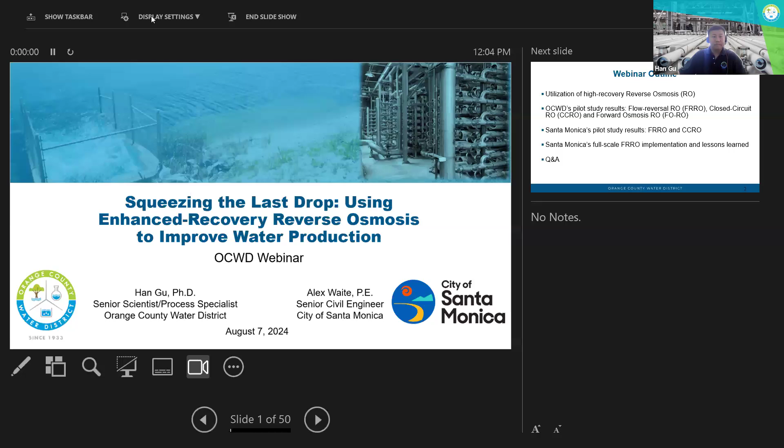Right, thank you very much, Meta. Let me get the presentation mode. Thank you very much, Meta, for the kind introduction. Good afternoon, my name is Han. I'm a senior scientist, process specialist from Orange County Water District. I'm really excited, happy, and feel honored to join this webinar.

As Meta mentioned, we have 2 presentations. The unifying theme is squeezing the last drop, using enhanced recovery RO to improve water production. This is the webinar's plan: I will talk first about OCWD's pilot studies on 3 high recovery RO technologies, and then Alex will take over and talk about Santa Monica's pilot study and full-scale implementation of 1 high recovery RO technology, and we will end with the Q&A session.

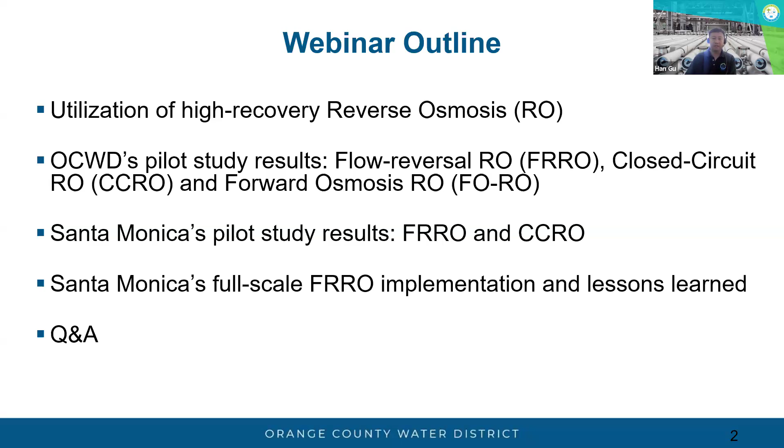So this is the title of my presentation today. I will share with you 3 piloting studies using high recovery RO technology. They are flow reversal RO or FRRO, closed circuit RO or CCRO, and forward osmosis RO or FORO. A brief outline of my presentation follows.

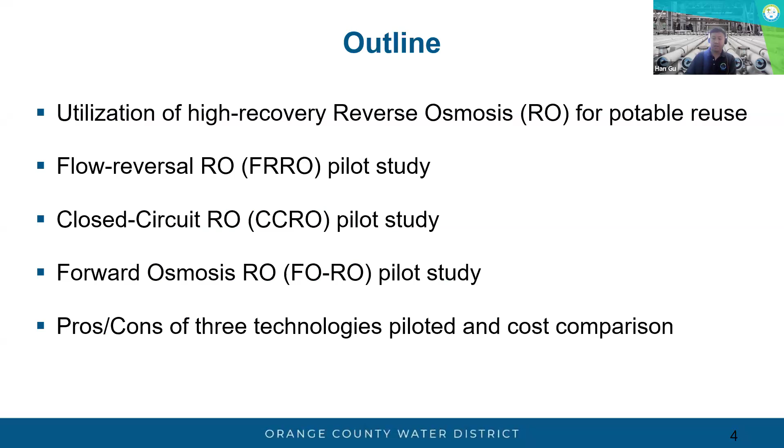I will provide some background information which will lead to the motivation for this work, which is to utilize high recovery RO to increase the recovery for potable reuse applications. I will go over each technology separately, and near the end, I will show you a table that summarizes the pros and cons of the 3 technologies we pilot tested, and discuss preliminary cost comparison among the 3.

So first, some background information. I think some of the audience here are familiar with reverse osmosis systems and processes. Conventional RO can remove dissolved solids, basically salt from the water, macromolecules and pathogens, but the recovery is still limited, mostly by mineral scaling in the feed water. If we're talking about potable reuse application, we can go up to 85% recovery on a 2 or 3 stage RO. This means 15% of the feed will become a concentrated waste stream.

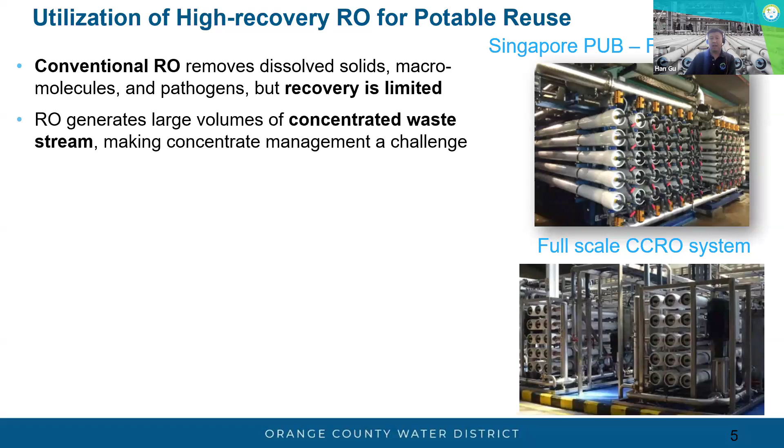For inland application, concentrate management and discharge is a real challenge. At R&D department, we have explored several high recovery RO technologies in the past 5 or 6 years. I mentioned the CCRO, FORO, and FRRO pilot testing. The goal here is to really test them out in pilot scale to make sure operationally they're feasible, and also to see if they're economically viable on a larger scale.

Closed circuit RO has been pilot tested at a number of utilities, including Singapore Public Utilities Board or PUB, Padre Dam, and LA County Sanitation District. The recovery ranges from 90 to 96%.

Singapore PUB also tested flow reversal RO at full scale in one of their NEWater facilities from 2017 to 2022. They were able to increase their recovery from 75 to 90%. The image on the upper right shows the Singapore retrofitted FRRO. They didn't really build a new facility, but modified the existing RO to implement flow reversal.

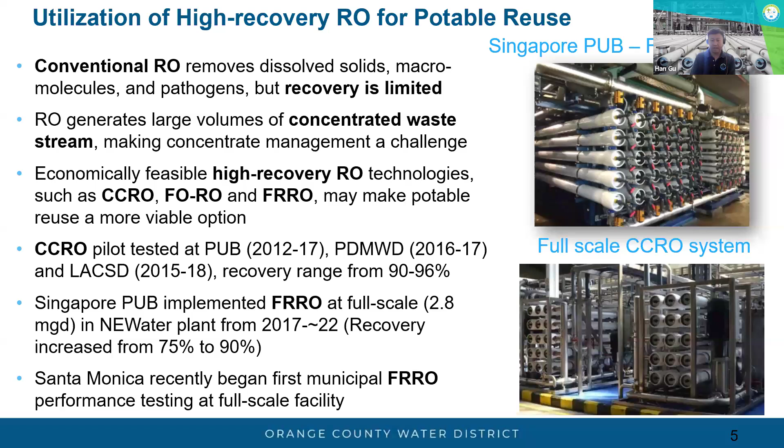And lastly, the city of Santa Monica has recently begun testing the first municipal flow reversal RO at their full-scale facility. Alex will talk about that in the second half of this webinar.

All pilot testing I will be mentioning today was completed at the Groundwater Replenishment System, or GWRS, at Orange County Water District. GWRS is currently the world's largest potable reuse facility. We can produce up to 130 mgd of highly purified water.

We completed the final expansion of the GWRS in 2023. This is a joint project between OC Sanitation District and OCWD. This simplified diagram shows the basic layout for the advanced water purification facility within the GWRS.

We're taking secondary wastewater effluent from OC Sanitation District, from 2 plants, about 174 mgd, and it undergoes a 3-step treatment process. First step is microfiltration, ultrafiltration. Second step is reverse osmosis, and then ultraviolet light with advanced oxidation, or UV-AOP process.

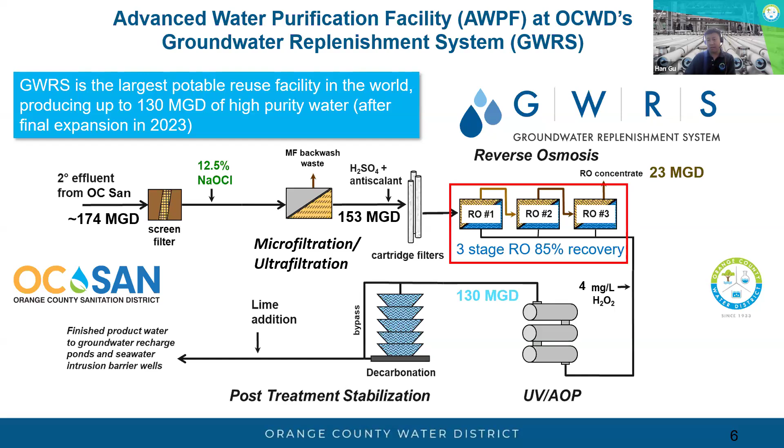After post-treatment, the final product water will go to our groundwater recharge basins in Anaheim and seawater intrusion barriers to prevent seawater intrusion. Focusing on the RO part, we have 27 5-mgd RO units. Each of them is a 3-stage RO running at 85% recovery. The combined concentrate discharge is about up to 23 mgd, and currently it is going to the Pacific Ocean.

So what is the benefit of increasing recovery for the RO on GWRS? The most obvious reason is if we're able to increase the recovery, say from 85% to 91%, as shown in this diagram, we could generate more RO permeate. In this case, about 9 mgd more additional permeate, and at the same time, we could reduce the RO concentrate discharge by the same amount, so from 23 down to 14.

There are also many other drivers for enhancing RO recovery. This includes, first, cost of imported water has been increasing steadily over the years, so water resources have become really valuable. Secondly, water conservation methods have reduced the source volume available for us to treat, so we have less wastewater to treat with. And thirdly, environmental stewardship — we don't want to discharge large volumes of highly concentrated brine into the environment.

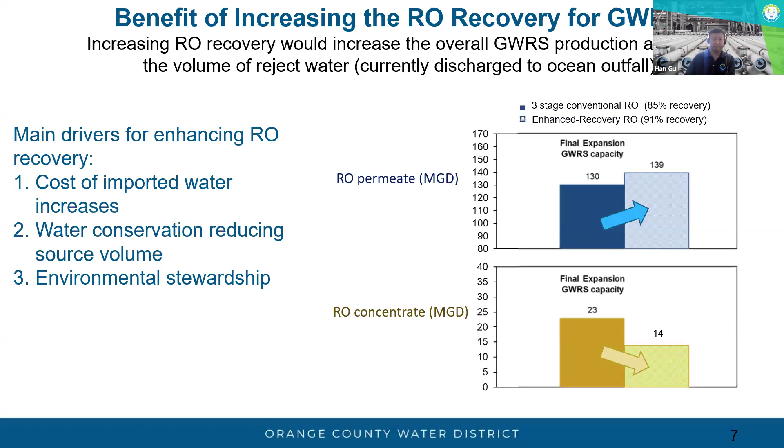With that, I will go into the first technology I will cover today, which is called flow reversal RO. This is a continuous system utilizing conventional RO components, but there are 2 key features. The first one is called the feed-side flow reversal, or FR. This diagram illustrates the basic concepts. Let me get my laser pointer out.

So this is a RO pressure vessel. You can imagine there's RO membrane installed in series inside. In a conventional RO configuration, the flow direction is fixed. The water will always go in from this side as undersaturated solution, and as the water moves across the pressure vessel, it gets more and more concentrated because we're removing permeate.

Near the exit region, mineral ions in the feed water could become supersaturated, so we could see mineral ions or crystals start to form on the membrane surface. This is due to the concentration polarization effect.

For the flow reversal process, it's really simple. We're switching the flow direction periodically, so we will feed in from this side. We use the undersaturated feed solution to dissolve or remove the crystal or scale already formed on the surface from the last cycle, and we're also reversing the concentration polarization profile.

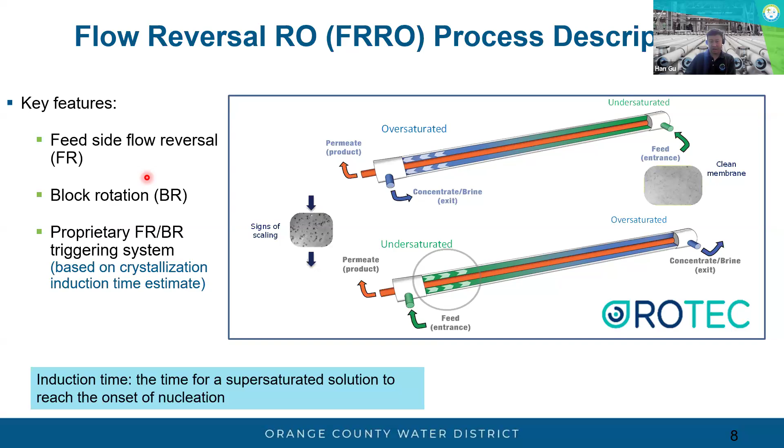Alex will explain that in more detail in his presentation.

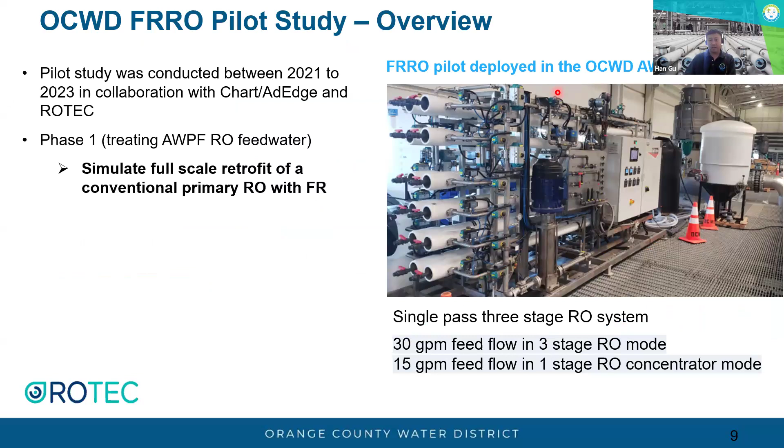This is the overview for the flow reversal pilot testing at Orange County. We conducted this between 2021 to 2023 in collaboration with Chart and Rotec. There are two phases to this pilot testing. In phase one, we're treating the AWPF RO feed water, simulating a full-scale retrofit of a conventional primary RO. In the second phase, we're treating the RO concentrate directly, simulating an RO brine concentrator.

Because we completed phase one before the completion of the final expansion, the final expansion feed water actually changes—we have higher salinity in the feed—so we wanted to do a repeat. This is called phase three, just to ensure that the pilot could keep the good performance and treat the final expansion feed water. I included a photograph showing the pilot deployed in the AWPF RO building.

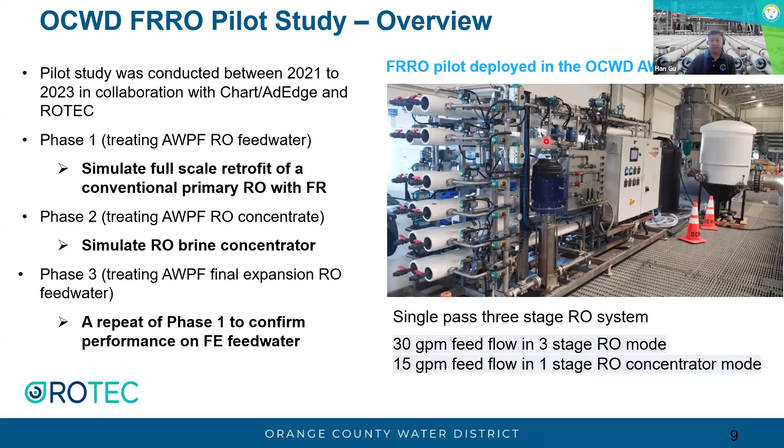This is a 30 GPM system, 3-stage RO, single pass. This is the summary of findings for the flow reversal pilot study. In the first phase, the primary phase, we achieved 89 to 90% stable recovery. No additional chemical is needed.

Here's a plot showing the normalized specific flux over about a 3-month runtime. This is a steady state trial where we keep the recovery at 90%. The block rotation and flow reversal is about 40 minutes for the first and third stage, and for the second stage the flow reversal occurs every 10 hours. Overall, the normalized specific flux declines about 23%.

Overall, pretty stable. We also optimized the chemical cleaning recipe and determined that a 3-month runtime between chemical cleanings is most optimal. This is in comparison with the full-scale RO CIP interval, which is about 6 to 12 months.

We also completed phase three after the final expansion to ensure the pilot could treat the final expansion feed water. Unfortunately, for the RO concentrate mode, it was not very successful. Basically, we were able to run to a recovery of about 91% overall, but we determined the operation was not sustainable because of very heavy scaling, and the clean back was not very good after a CIP.

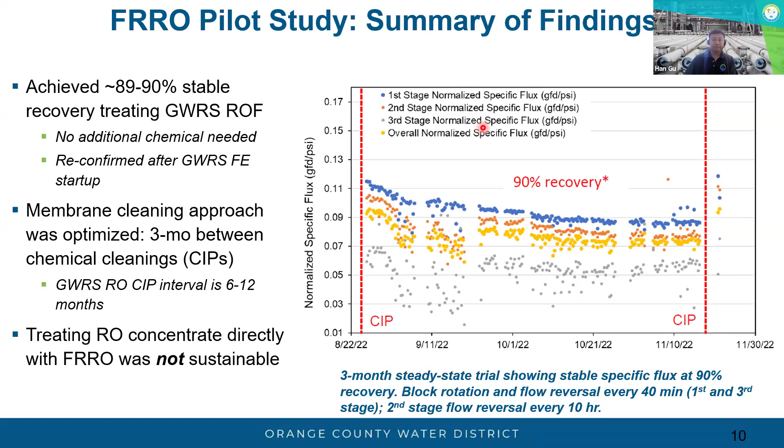So I will now talk about the second technology. This is called the closed circuit RO, or CCRO. It's a single stage RO, but a semi-batch process, relying on complete recycling of the RO concentrate. Because this is a semi-batch process, there are 3 steps in the operation mode.

In step 1, called the closed circuit mode, in addition to conventional RO components—feed pump, high pressure pump—we also have a recirculation pump that recirculates the RO concentrate back to the feed, 100% of the concentrate back to the feed, while we're still producing permeate. As time goes on, the water in this loop becomes more and more concentrated, and the filtration time determines the volumetric recovery and the pressure in this loop.

At the bottom, we have a side conduit, which is just an empty pressure vessel with no membrane, holding the fresh feed water from the previous cycle.

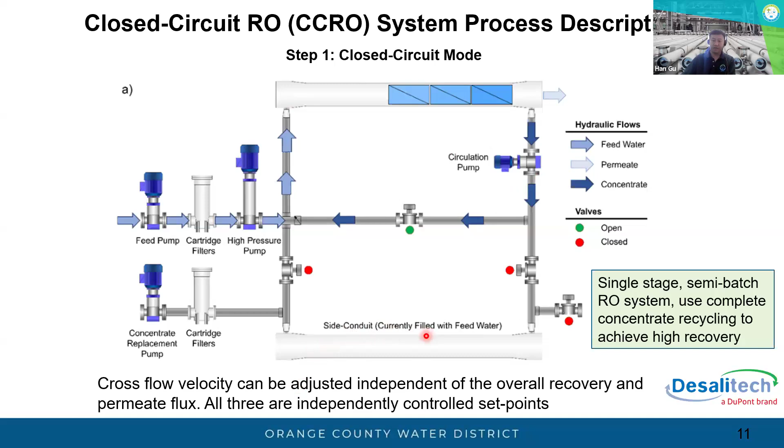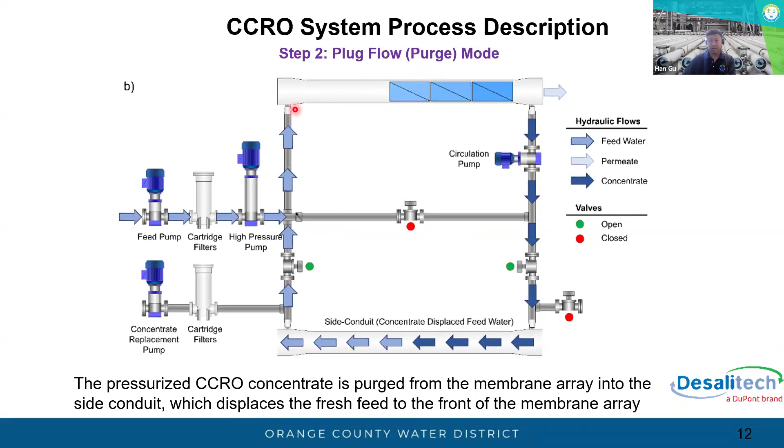In step 2, called the plug flow mode or purge mode, at the end of a cycle, when the volumetric recovery reaches the set point, the final concentrate gets pushed into the side conduit, and at the same time the fresh feed gets pushed into the front of the pressure vessel holding the membranes. This is essentially a flushing step.

Step 3 is called the side conduit refill mode. A concentrate replacement pump activates and recharges the side conduit with fresh feed, then discharges the final concentrate from the last cycle out of the pilot. The key here is to maintain good concentrate flushing efficiency. If we don't have that, we will have scale or precursor of scale trapped in there, and it will foul the membrane quickly for the next cycle.

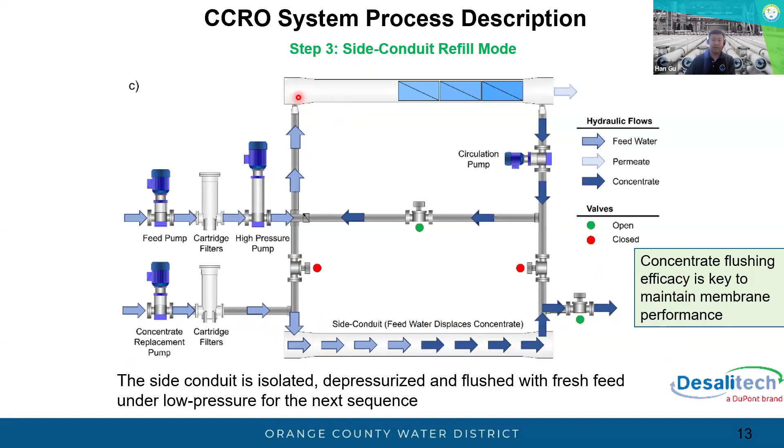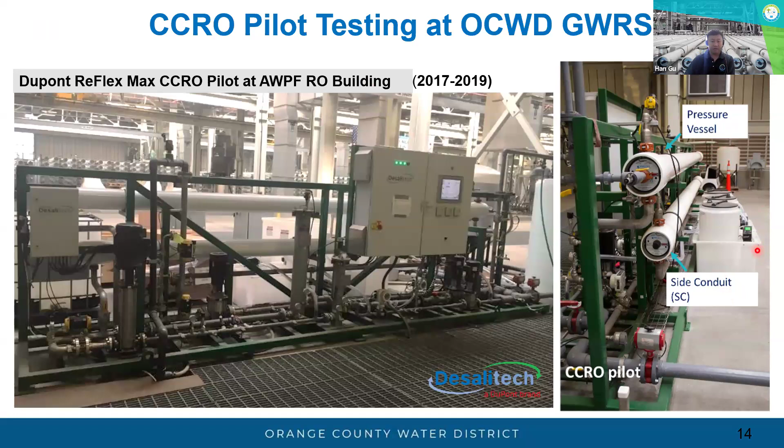Here are 2 photos showing the CCRO pilot deployed in the RO building. We tested a DuPont Reflex model, a 10 GPM system. You can see on the photo a pressure vessel on top holding the RO elements, and at the bottom the side conduit for the flushing purpose. This pilot testing was completed between 2017 and 2019 in collaboration with DuPont and Jacobs.

There are 2 phases. Phase 1, we're using the CCRO to treat the MF effluent, which is the same as RO feed water. This is simulating a full-scale CCRO as a primary RO, and we're filling the side conduit using the RO feed water from the plant.

In phase 2, we're treating the RO concentrate directly. This is simulating a RO brine concentrator or 4-stage RO, and we're doing the flushing using either the RO concentrate water or RO feed water from the plant.

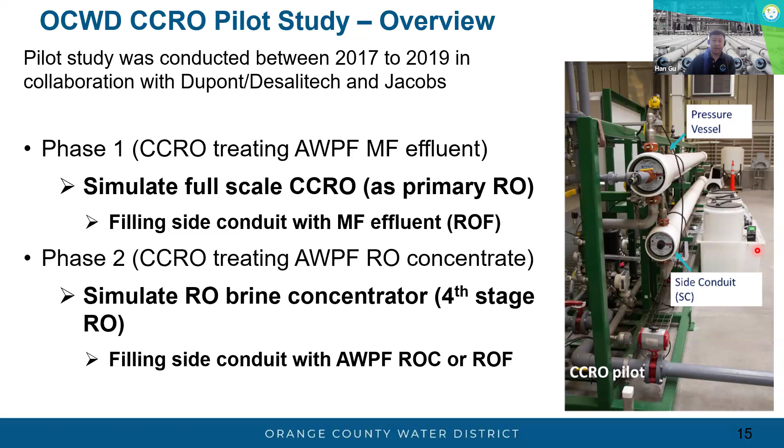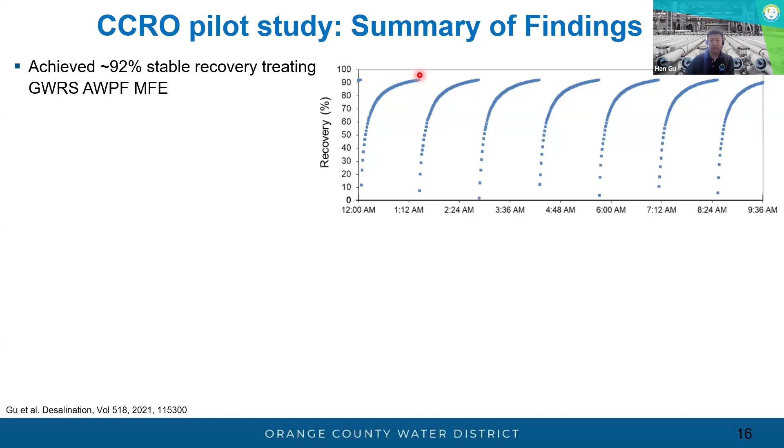Here's the summary of the findings from this phase. In the primary mode, we achieve about 92% stable recovery. This is a plot showing percentage recovery versus time. You can see the recovery is not constant in the CCRO - it's actually gradually increasing until it reaches the maximum set point, which is 92% in this case, and then it will trigger the purge mode, and we start the next cycle.

So the filtration time is about 70 minutes, and you see the cyclic behavior for the CCRO. For the concentrator mode, we achieve about 91% overall recovery treating the RO concentrate.

Experimentally, we determined that flushing the side conduit using the RO feed water extended the runtime between the CIPs by more than 2-fold. We also tested this so-called adaptive variable recovery mode to cope with fluctuating feed water quality. I have this diagram to illustrate this concept.

Here we have a plot of electroconductivity of the RO concentrate coming into the pilot, represented in the red curve. In this case, we're not running the CCRO at a constant maximum recovery, but instead we're using a maximum EC trigger. The concept is the CCRO will change its recovery based on the feed water quality. With this, it can improve the system performance.

And lastly, we determined the optimum runtime between the CIP is about 2 months for this pilot.

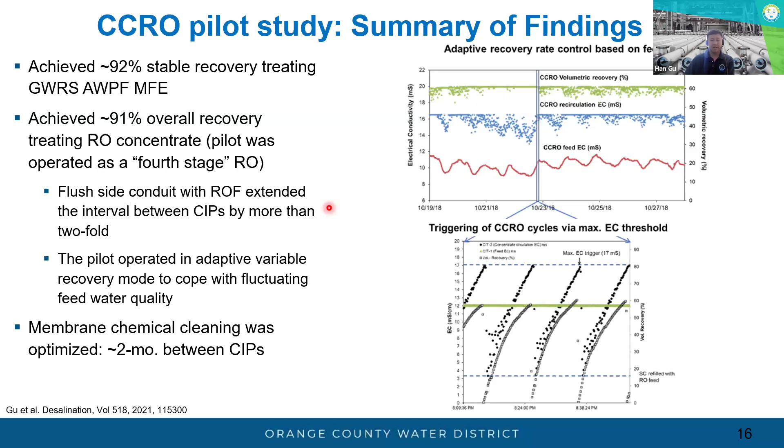Okay, I'll move on to the third technology I will cover today. This is called the forward osmosis RO. This is different from the previous two - it's a hybrid membrane system because we have an FO membrane in front coupled with the RO membrane. This is a double barrier system, one pass.

The key here is to maintain a draw solution loop. The draw solution is sodium chloride in this case. The FO membrane looks like this - a flat sheet membrane stacked on top of each other to form a membrane module.

So the feed water here is the RO concentrate coming from the GWRS. When the feed comes in, it gets in contact with the FO membrane and at the same time gets in contact with the regenerated draw solution. Because of natural osmotic pressure differences, we see a water flux moving from this direction to that.

This is causing a diluted draw solution to be produced, and at the same time we're creating a concentrate reject, which contains the contaminant removed from the RO concentrate. The RO will regenerate the draw solution, producing a final permeate, and this will loop back and link with the FO.

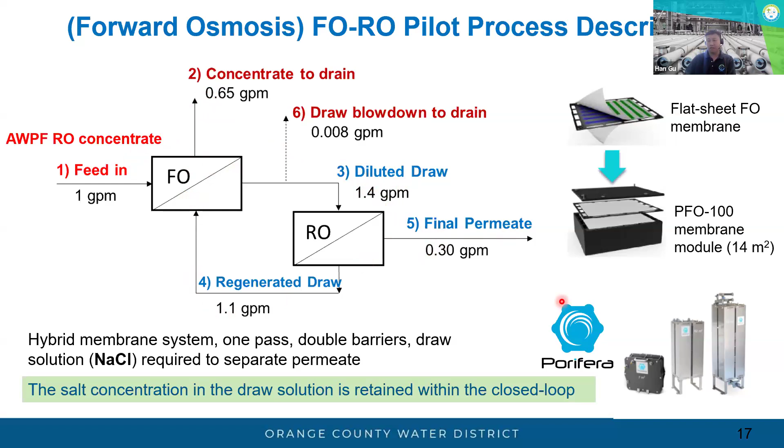One of the unique features here is the salt concentration in the draw solution loop is retained within the closed loop. So here are two photos showing the pilot deployed in the AWPF RO building.

We have this 1 GPM system from Porifera. It's much smaller than the other two pilots. You see the two FO modules here - they're running in parallel - and the draw solution makeup tank. And we have the control system here.

And behind the pilot, this is a side view. You can see a pair of seawater elements, RO elements. This is for the draw solution regeneration.

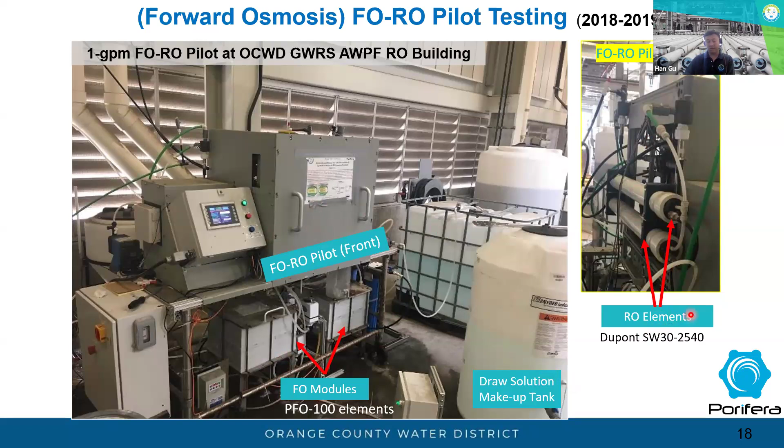Okay, so this slide summarizes the basic findings for the FO-RO pilot study. We're able to treat the RO concentrate directly, and the FO-RO system was able to run to about 35% recovery. This is equivalent to about 90.3% overall recovery.

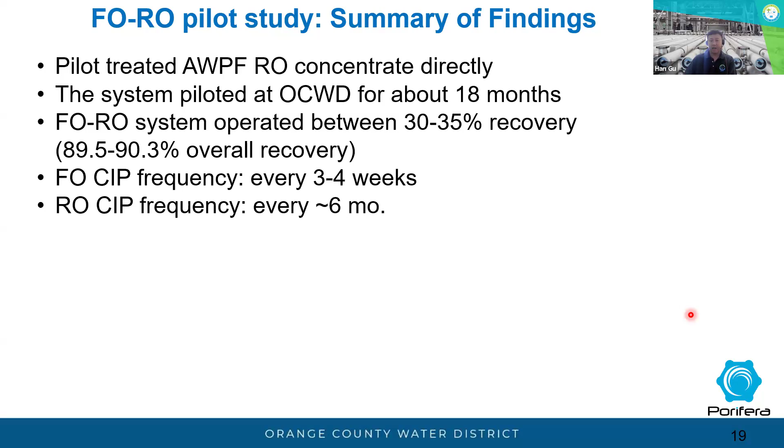The FO CIP frequency is about 3 to 4 weeks. The RO CIP interval is about every 6 months. We do encounter a number of operational challenges in this pilot study.

First one is a pretty severe organic fouling and silica scaling of the FO membrane, so that's why we need to clean it very often, less than a month.

And then we also observe some FO membrane integrity issues. This is mainly due to, if we have a pressure swing upstream, that will translate into the FO membrane, and sometimes we see membrane delamination problems.

And thirdly, we have some mechanical issue with a pressure relief valve, and that caused some draw solution bleed.

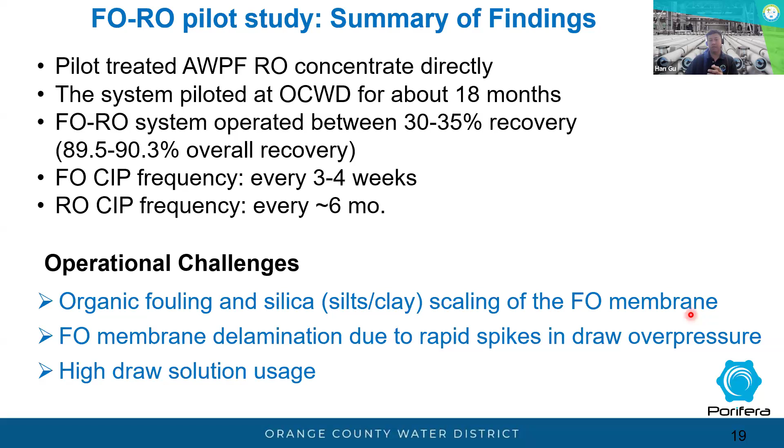So we need to add a lot of salt to make up for the salt loss in this case.

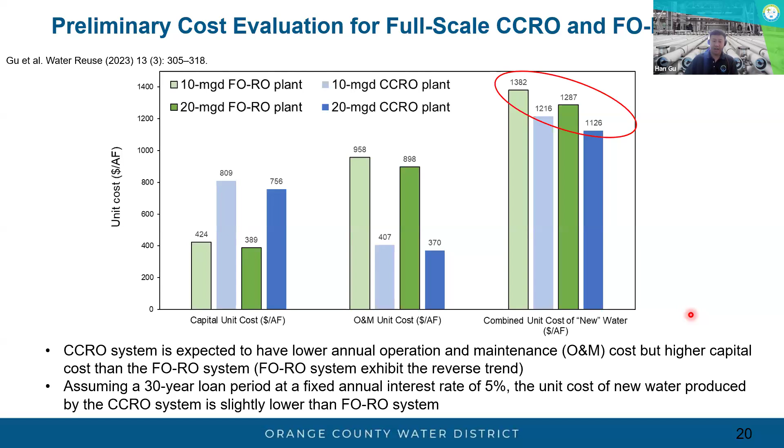For the CCRO and FORO pilot study, we also asked our partner Carollo Engineers to come up with a 10 and 20 MGD full-scale system design and preliminary cost estimate. I won't go into detail here, but the conclusion is: looking at the combined unit cost of building either a 10 or 20 MGD system using either technology, the cost is quite similar—about $1,100 to $1,400 per acre foot. This is because CCRO has higher capital costs but lower annual operation and maintenance costs, while the forward osmosis RO system has the reverse trend.

For the flow reversal retrofit, we did our in-house estimate using OCWD site-specific cost numbers. Here we're looking at 3 cases. First, if we build a conventional RO system, the unit capital cost is about $90 per acre foot. If we retrofit an existing RO system to get recovery up to 90%, we generate only about 0.28 MGD additional permeate, so the unit capital cost is about $621. The third case is the so-called melded rate: looking at the RO units plus the retrofit cost, divided by the 5.28 MGD, that cost comes out to $118 per acre foot.

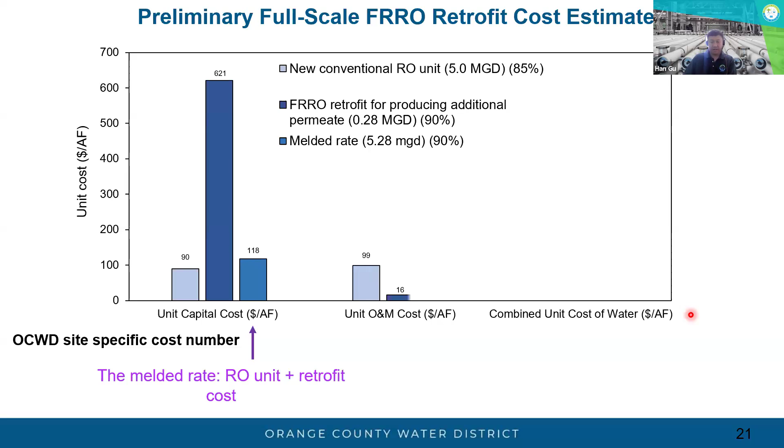Similarly, we can look at the unit operation and maintenance costs. For conventional RO units, it's about $99 per acre foot. For the retrofit, we need to spend about $16 more per acre foot because of more frequent chemical cleaning and higher electrical power consumption due to membrane fouling. Looking at the combined cost, we're talking about $637 as the combined cost for generating the additional water.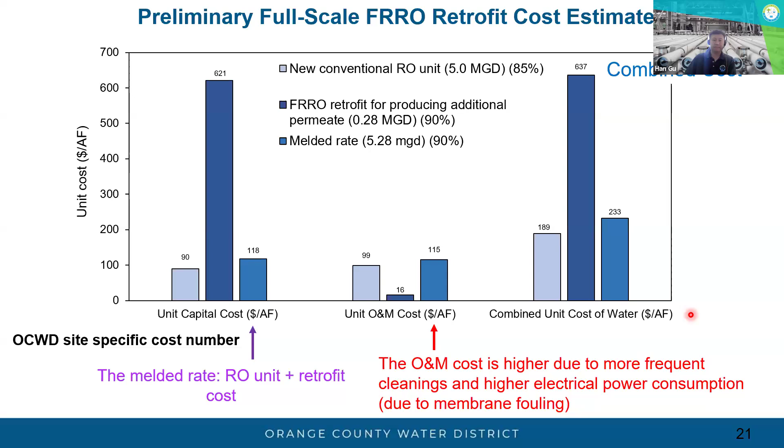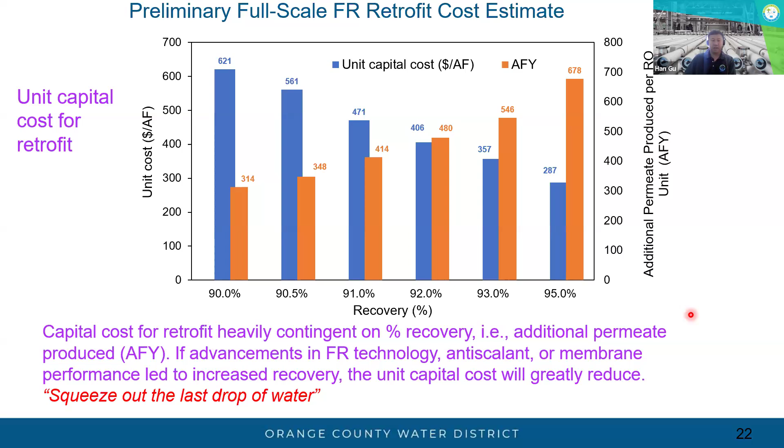Another interesting observation from this cost estimate is that if we're able to increase the recovery by just 1%, from 90% to 91%, we can reduce the unit capital cost greatly—down to about $471. This is because we're able to generate more permeate with increased recovery. So the message is: if there's advancement in flow reversal technology, better anti-scaling, or better membrane performance leading to increased recovery, the unit capital cost will greatly reduce. Basically, we can squeeze out the last drop of water here.

In conclusion, I want to show this table summarizing the relative pros and cons of the 3 high recovery RO technologies. First, flow reversal RO: the pros are it's able to retrofit an existing RO, the CIP interval is about 3 months, and salt and organic rejection are very similar to conventional RO. The disadvantages are the concentrator mode was not successful, and we saw recovery reduction during the transitional period, losing about 1% overall. So the primary RO mode tested achieved about 89 to 90% overall recovery.

For the closed circuit RO, it worked well in both primary mode and concentrator mode. We also tested an adaptive approach to cope with feedwater quality fluctuation. The cons are the concentrator mode requires RO feedwater for side conduit flushing, so we need to push the system harder to compensate for the loss, and permeate quality varies with time in a cyclic behavior. We achieved 92% recovery for the primary mode and 91% for the concentrator mode with CCRO.

Lastly, for the forward osmosis RO, the internal salt retention minimized the concentrate reject salinity, and it also had better organic and virus rejection than the CCRO. Some of the negatives are a pretty short CIP interval, some membrane integrity issues, and high draw solution usage. Overall, the concentrator mode achieved about 89.5 to 90% overall recovery.

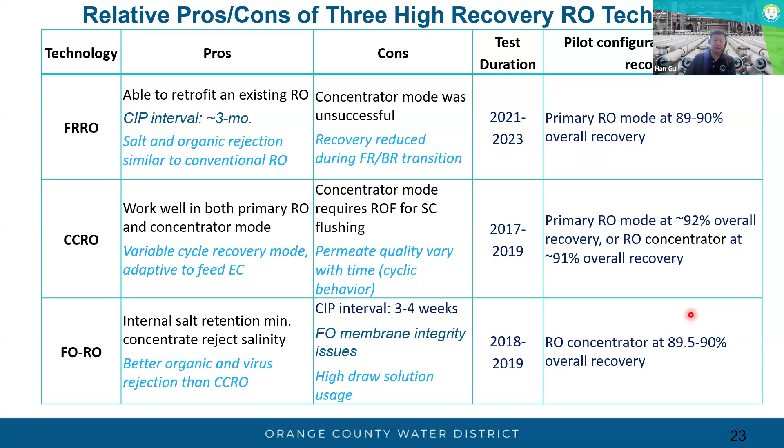Two other important conclusions: the unit cost for additional permeate from a full-scale flow reversal retrofit is lower than both the CCRO and FORO systems, and if we're able to increase recovery a little more, the dollar per acre foot will drop greatly. I also want to mention that all three pilots produced high quality permeate that could be blended with existing primary RO permeate to increase overall production.

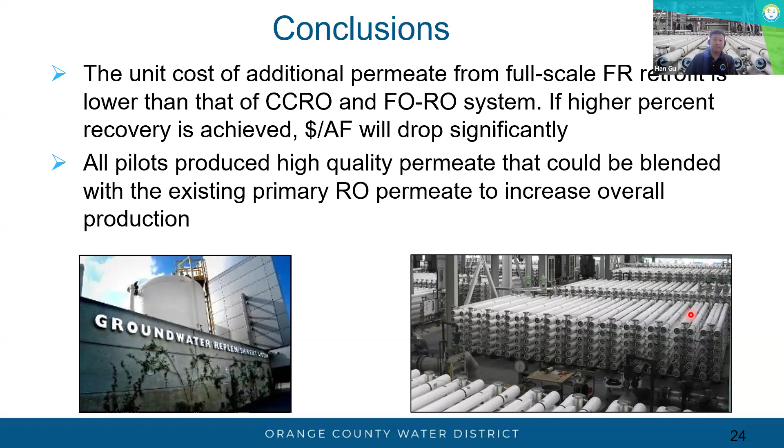I will turn it over to Alex to talk about the full-scale implementation for the flow reversal system.

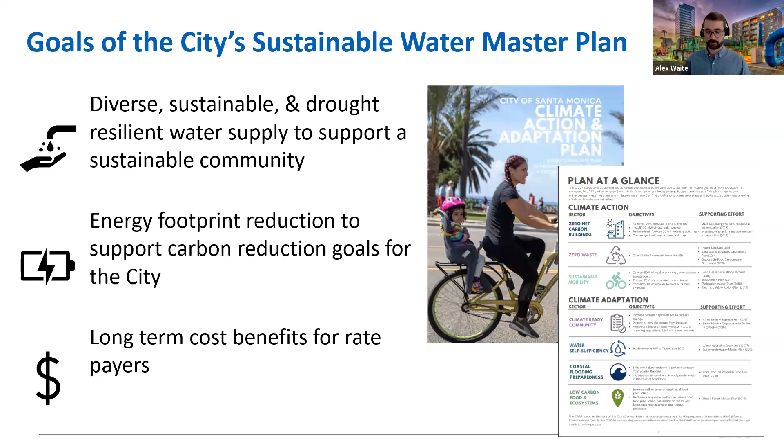One of the projects identified in that 2018 Sustainable Water Master Plan was the Olympic Wellfield Restoration and Arcadia Water Treatment Plant Production Expansion Project. The Arcadia Water Treatment Plant is a groundwater desalting facility constructed in 2010 with a 10 MGD capacity. We are wrapping up construction for upgrades to this facility, including a UV, AOP, and GAC pretreatment system for the Olympic wellfield, which was contaminated with historical contaminants like 1,4-dioxane, TCE, and PCE. That water is then blended with our existing water treatment system.

The second part of the project is expanding our reverse osmosis system, retrofitting to a higher recovery, enhanced recovery process that can achieve greater than 90% recovery. Right now we're at about 82, 83%, and now we're looking at 90% or more. This also expands the total capacity of the facility from 10 MGD to 13 MGD.

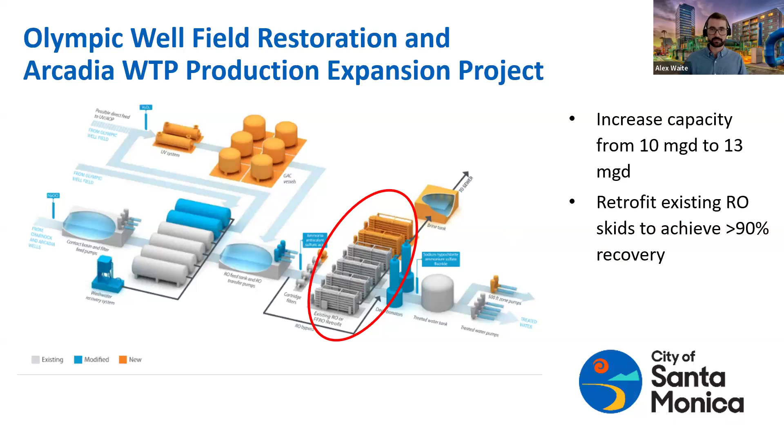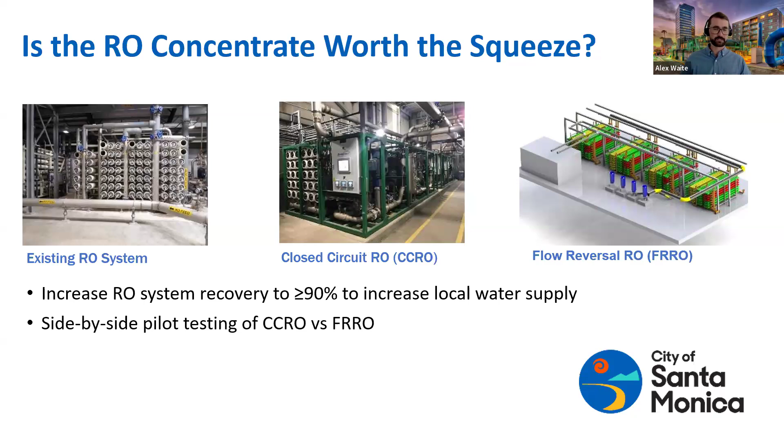So we looked at whether the concentrate was actually worth the squeeze, and whether there was benefit to investigating these technologies further to improve our local water resources. Back in 2010, we investigated pilot studies for closed circuit RO and flow reversal RO: closed circuit provided by Desalitech, now DuPont, and flow reversal RO by Rotec. We did a side-by-side pilot test of these technologies, comparing against the existing RO system, a 1900 GPM feed capacity, three-stage system going around 83 up to a maximum of 85%.

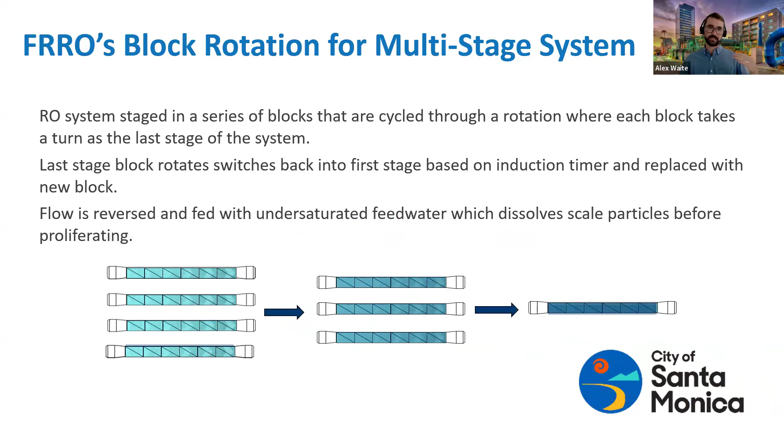This reversal process, coupled with the flow direction switch, feeds undersaturated feed water into the vessel that was seeing some pretty aggressive water, dissolving scale particulates before they start proliferating. These two processes together are able to not just meet an existing recovery, but push the recovery well beyond what a conventional system is able to accomplish.

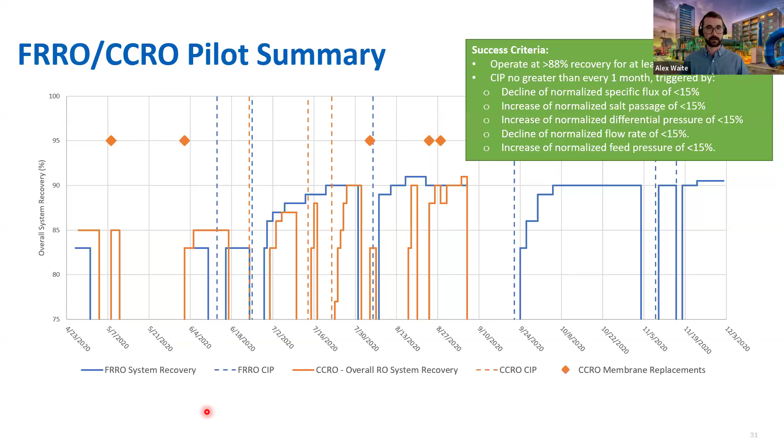Let's dig into the pilot summary now, looking at flow reversal RO versus CCRO. This slide shows the recoveries of the two systems, with the dashed line showing intervals for CIPs, and diamonds showing membrane replacements. For the flow reversal process, we achieved sustained operations at higher recovery, at 88% or greater. For the CCRO, we were unable to achieve those target recoveries, and ultimately ceased operations on that pilot in early September of 2020.

And here's a table kind of summarizing the performance of both of those systems.

Some key things to point out for the flow reversal process: we had a total online time of over 140 days, with 106 days at 89% or greater recovery. We also had 5 CIPs during that pilot, so about one CIP a month, and those membranes were never replaced.

And compared against the CCRO, we had 3 CIPs and several membrane replacements.

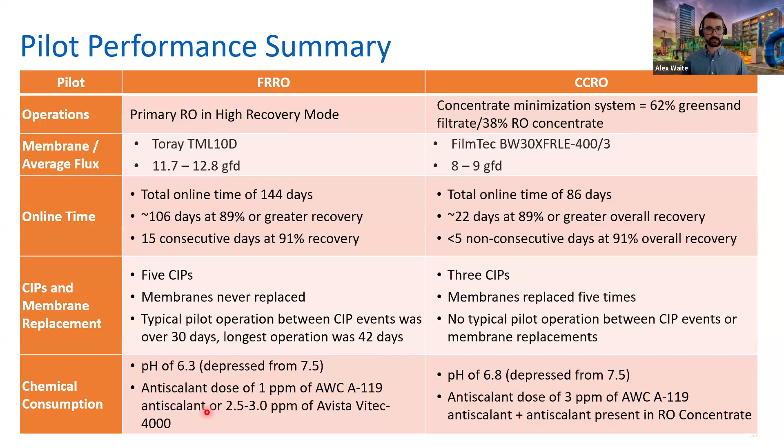So these pilot results then fed into what we could look at for a full-scale system. The next step was looking at the cost competitiveness of flow reversal RO versus closed circuit RO versus the cost of imported water.

So we did this side-by-side analysis, and what we found is that for retrofitting the existing 4 RO trains, our cost was about $1,070 per acre foot for retrofitting all 4 of our conventional RO trains.

Now compare that against the cost of imported water at 2018 rates, and they're actually pretty competitive. Then you compare that against the cost of a brand new FRRO skid, and that's significantly more expensive. Comparing again against 2 closed circuit RO trains, the cost is even higher. So this shows that the flow reversal retrofit is very cost advantageous for us.

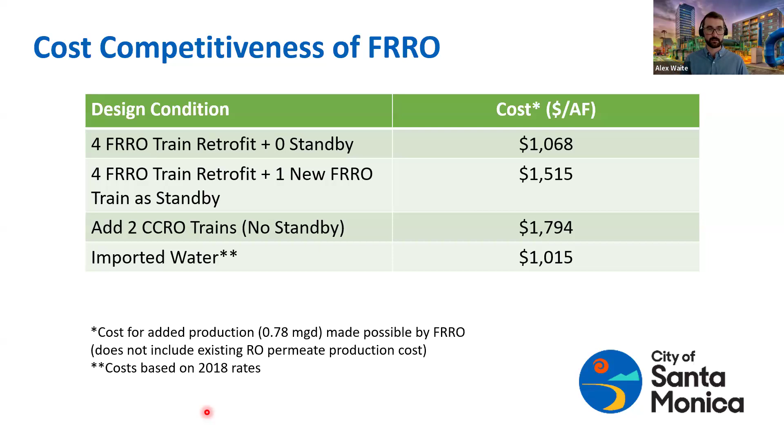So you put all this together, the results from the pilot testing and the cost benefit analysis, and there are several benefits for Santa Monica to pursue full-scale implementation of the flow reversal RO retrofit. First, we saw stable operations at high recovery, 90% or more.

We have the ability to retrofit existing RO skids, so we have an existing asset and can retrofit it in place without building new capacity or a new facility, which lowers our overall capital costs.

There's lower operation and lifecycle costs with the flow reversal RO compared to the CCRO when looking at energy and chemical consumption, and also CIP frequency.

We have funding flexibility. Since we're retrofitting an existing system rather than building a brand new one, in an instance like COVID where funding became very tight, we actually had the flexibility to look at retrofitting maybe 1 out of the 4 trains, or 2 out of the 4, and wait to see where the funding comes back in. Luckily, through our funding partners, we didn't have to go that route. We were able to do all 4 simultaneously, but at least we had that flexibility.

We also have operational flexibility. In the event that flow reversal just isn't working for whatever reason, it's still a conventional RO system. You can turn off the flow reversal mode, go back to 82-83% recovery, and continue operating. So you don't have a stranded asset.

With all those things in mind, it overall builds into a relatively lower risk profile for the flow reversal process compared to a CCRO process for us in Santa Monica.

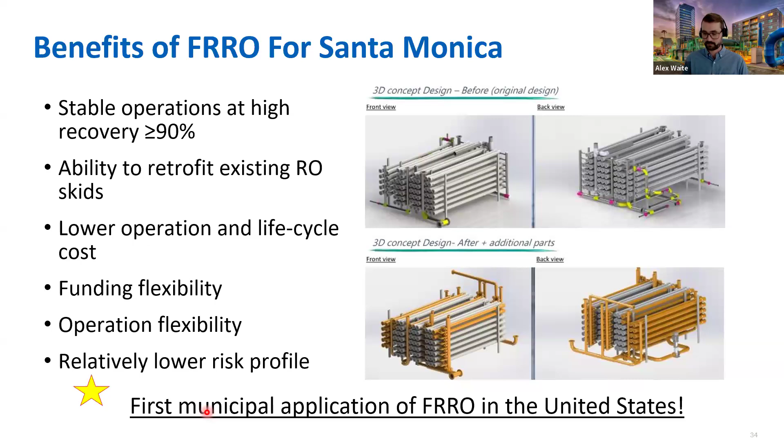Culminating in this: it's actually the first municipal application of flow reversal reverse osmosis in the United States. We're very proud to have the first municipal application for this project.

All right, so now we're digging into the full-scale implementation. We started construction on this project at the beginning of 2022. Since that time, we've done a lot of work on site, including the new UV AOP process, but also the retrofit of these 4 skids, which have now actually been operating for about 9 months.

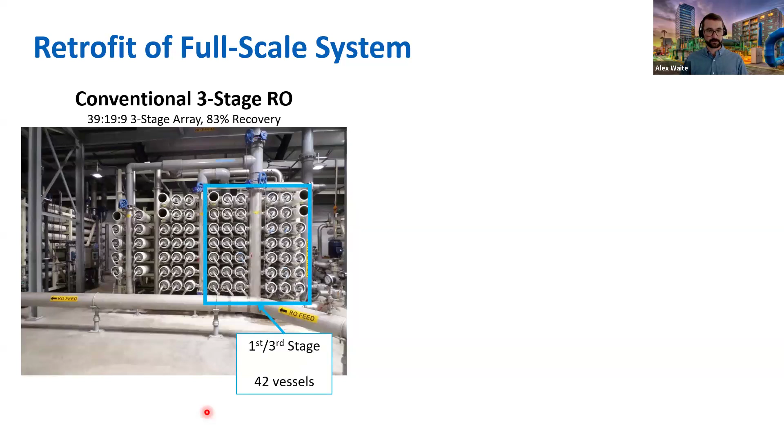So we just want to walk through what the retrofit looks like. The picture on the left-hand side shows the conventional system, a 3-stage array operating at 83% recovery. What this retrofit looks like is taking this first block, which was the first stage, and now it's our first/third stage block rotation group. We have the middle, which is second stage and has been retrofitted again to second stage, but with the ability to reverse flow back and forth.

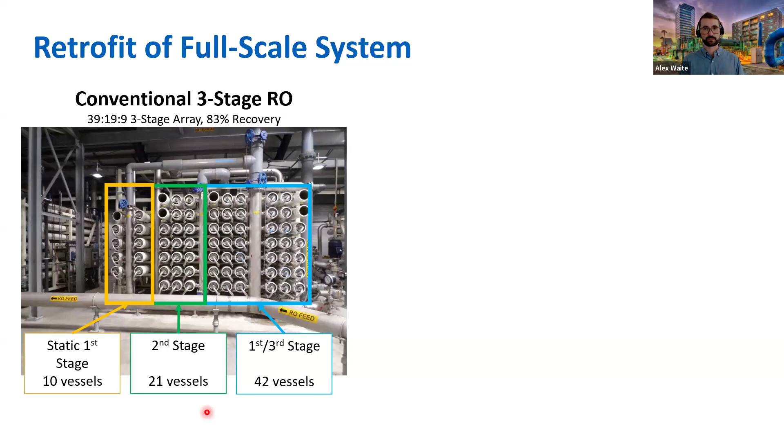Since this is a retrofit of an existing skid, we have to work within the hydraulics of the existing system. There was this block of about 10 vessels that was very complicated to bring into the flow reversal process, but critical to maintain an overall average flux rate of about 13 GFD. So instead of trying to finagle that into the retrofit process, this became a static set of vessels. Now we have a control group to compare against the blocks that are constantly rotating.

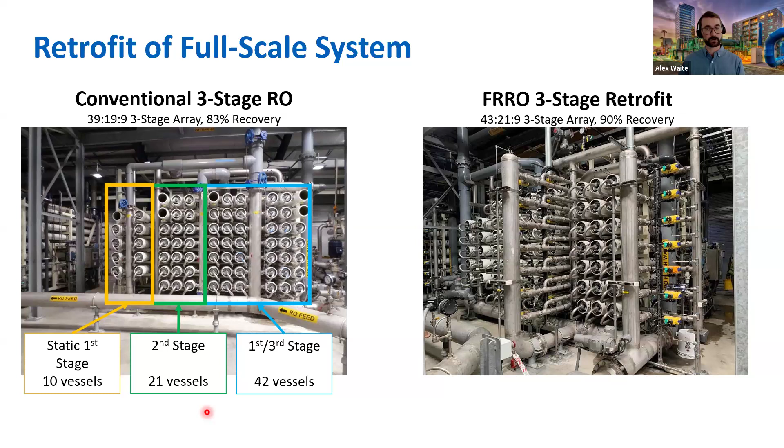The picture on the right-hand side is showing the completed retrofit, now with a few more vessels, but overall utilizing exactly the same vessels, a lot of the existing piping, but replaced with some new piping in certain locations and also additional valves, pumps, and control systems. So this is a summary of those changes from the conventional system to the flow reversal RO.

One of the key features I want to point out is with respect to the membrane. We were using the Toray TMG membrane, 440 square foot membrane. For the retrofit, we're actually using the same membrane, but now with a split ring brine seal. What the split ring allows is for water to flow back and forth in the vessel while still blocking water from impeding onto the next vessel in the process. It's a really neat design, a really simple seal.

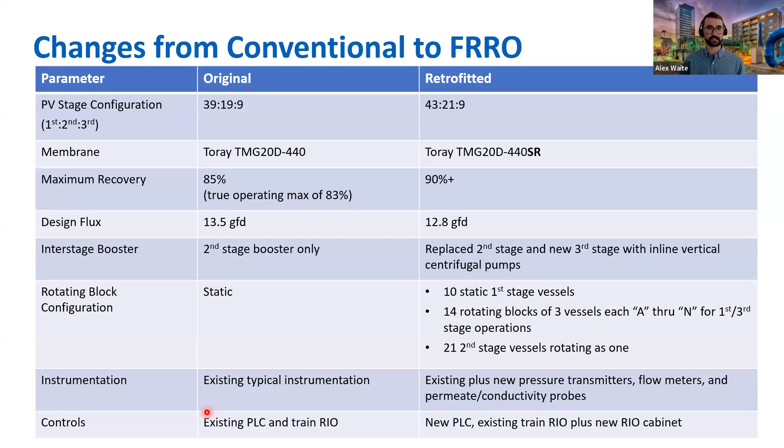As I mentioned, there's a lot of additional valves, an additional booster pump, and some additional controls and instrumentation in order to facilitate this fully automatic reversal process. So I want to show a schematic here of what that transition process looks like in this retrofitted system.

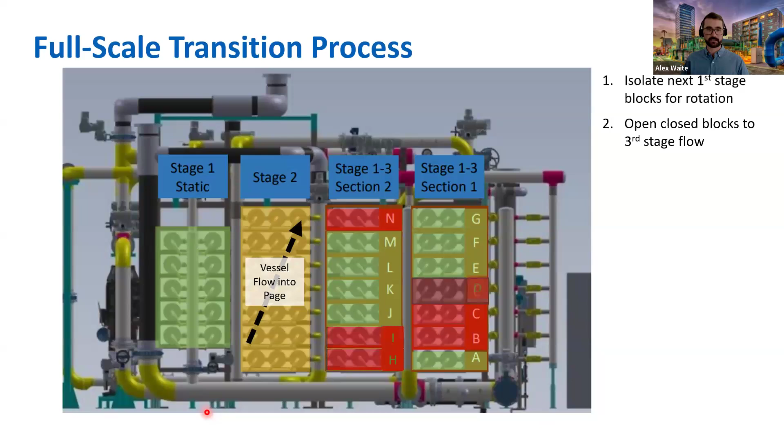This diagram is showing right now we have these 14 blocks, A through N. In this case, the ones in red are our third stage, so blocks B, C, and N are operating in third stage. As it goes through this fully automatic process, we have new blocks rotating out of first stage into third stage. The second stage is isolating and then flowing back and forth. The existing third stage blocks are now being brought back into first stage, and now the system stabilizes and begins operations.

In the data, it looks like the first stage booster pump is really providing the majority of the pressure through the reversal process, so it's operating in a plug flow mode. Then everything starts to slow down in order to facilitate those valve closures so we don't hammer our system with a water hammer. We're utilizing the first stage booster pump to push water through the process while the rest of it is being isolated.

In terms of the recovery, we're seeing a slight recovery drop during this transition process, going maybe from 90% recovery overall to about 75-76% during that transition phase. It takes about 36 hours to fully cycle through the entire process.

So in that previous example, we had blocks B, C, and N, and second stage going into the page. To rotate through all the blocks in every configuration to get back there takes about 36 hours. We have that 90% recovery in plug flow mode with a short transition step, but what this means is that the total recovery for this entire 36 hours is actually around 89.1% when you factor in all this time for the reversal process.

That's an important piece, and that's something we're continuing to investigate, how we can further optimize this to bring our total recovery over the 36 hours up a little bit higher. I'll mention a couple things we're looking at the end of the presentation.

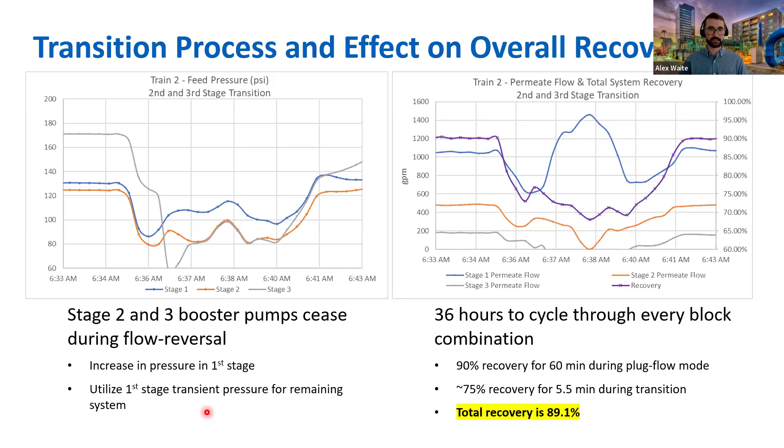All right, let's dig into some of the data and lessons learned. This is what the data looks like for the full-scale system. You see the cyclical process as the process is changing from one third stage block to another. The important piece to focus in on, though, is the space in between those reversals, that's when we're operating in plug flow mode. That's just like the same data you'd see at a conventional system, just with these hour transitions in the middle.

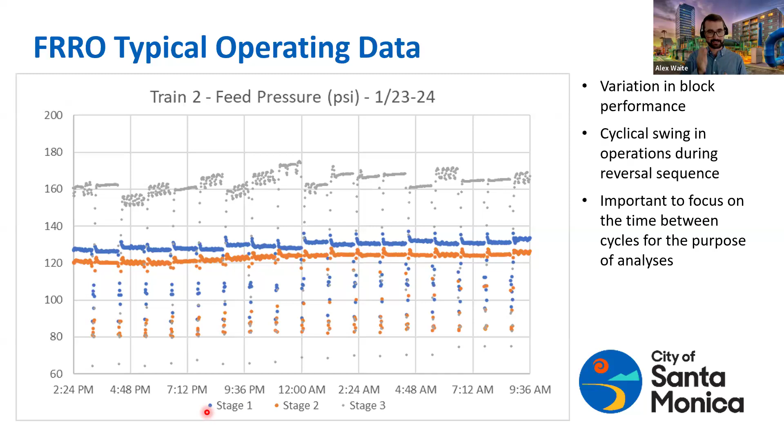Another important piece for Santa Monica, as I mentioned, is that energy footprint. What we found on the full scale system is that our specific energy consumption compared to conventional is actually significantly lower, even when operating at the higher recovery. This is showing data for one of our skids that was operating from October to December, and even at 90% recovery, we're seeing great SEC.

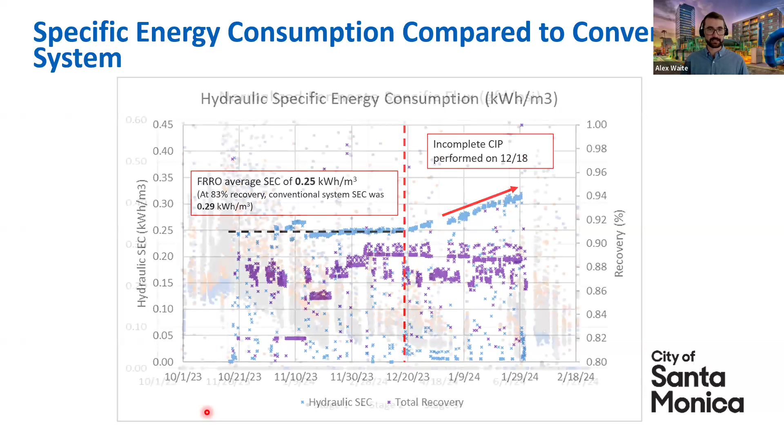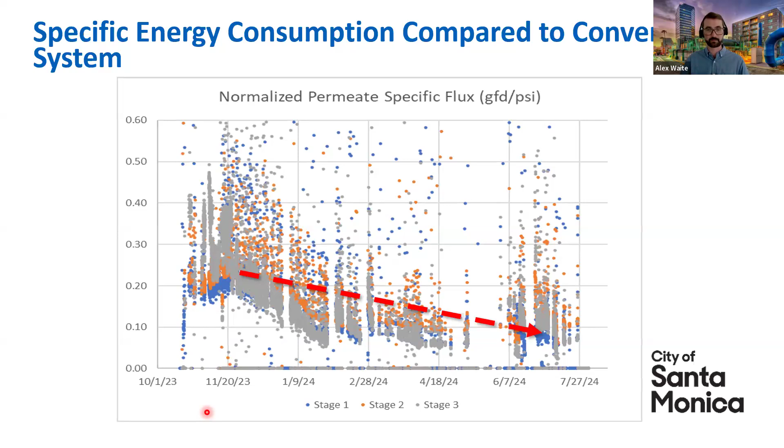But unfortunately, at the end of December, there was a CIP that was conducted, a clean in place, and it was actually an incomplete CIP, which led to fouling occurring in this train. Since that point, the performance has declined, and although we've done several CIPs, it really hasn't gotten to where we were expecting to be. This shows that although this process operates at that higher recovery, there is still the possibility for scale to form, and especially if you're introducing the opportunity for scale to form through an incomplete CIP process, it can really escalate even further.

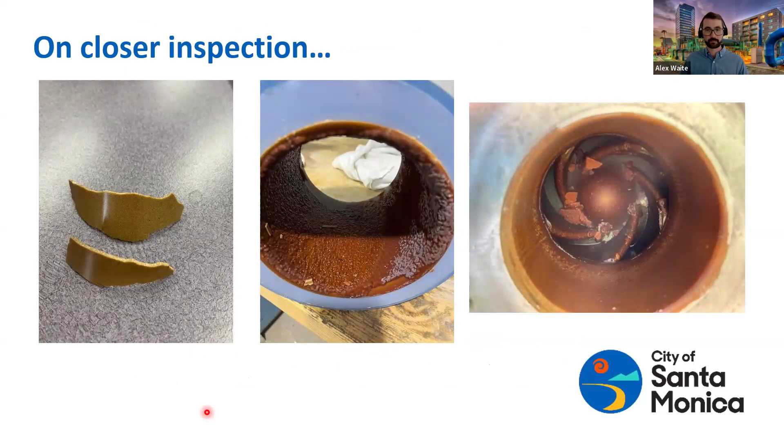So what have we done to look into this? On closer inspection, we found that we actually had a lot of scale in our system, and what you're seeing here is almost 100% calcium carbonate scale. In the middle picture is a flow meter, and we have a pump on the right-hand side. So this has a lot of impacts on the process as it moves forward.

So we looked at several different methods to prevent this scale formation. We did several of these, including increasing the RO feed anti-scalant dose for the Vitec 4000. And then we ultimately looked at, well, let's try and change the anti-scalant, let's try and change the pre-treatment to improve the process.

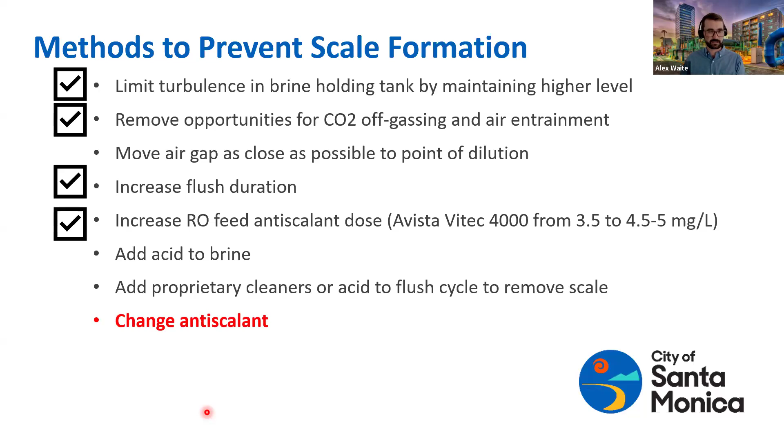So we did a test where we used the AWC A119 product on one of our RO skids for about a month and compared that to another skid that was previously using the Vitec 4000. And what we found is actually a really significant improvement in the performance using the AWC product for this particular application.

It ultimately was about an estimated savings of about $88,000 annually with this AWC versus the Avista product. And the savings is not coming from the anti-scalant dose, it's actually coming from an increase in the pH set point, so we're using less sulfuric acid to depress that pH.

So this is a point that the pre-treatment to the process is really just as important as the high recovery process itself. So if you have adequate pre-treatment, especially for these enhanced RO performance set points, 90% or more, with some pretty significant scale factors like alkalinity or silica, then pre-treatment is really critical.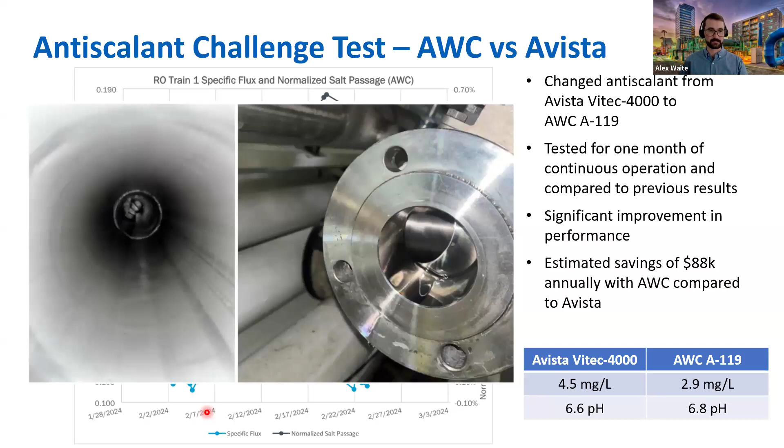And when we took apart this process, unlike on the previous anti-scalant, it was totally clean. We've taken it apart several times since that point in June, and again it's totally clean. So again, the pre-treatment is really critical to this process.

So I have a few more design considerations for folks who are considering these high recovery RO processes. When looking at the flow reversal process, there are a lot of pneumatic valves, about 56, 2 and 2.5 inch pneumatic valves on each train. So that's a lot of equipment that needs a preventative maintenance schedule to check that everything is working perfectly.

The valves are closing within an 8 to 10 second time period, so you're not creating a water hammer. So it's very important to the process. Also maintaining a higher pneumatic air pressure. When we started the process, we were operating at a little bit lower air pressure, but with such a big system and so many valves, you really need maybe a higher air pressure than you might think when you start. So that's just another piece to keep in mind.

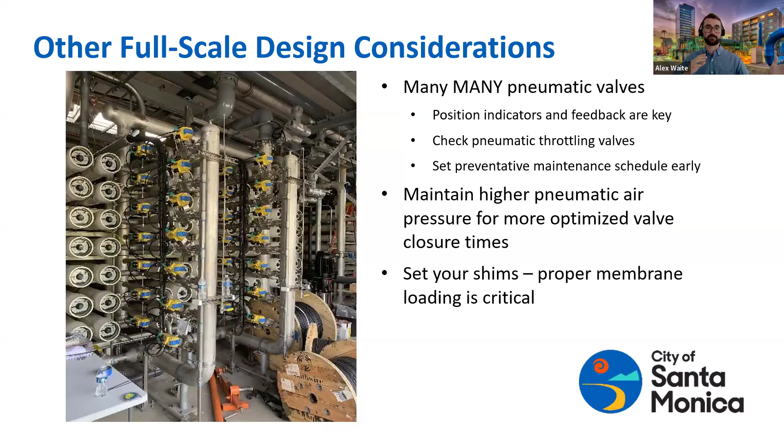Also setting your shims. So proper membrane loading is super critical with a process where you can send water not just one way, but now the other way. You have a situation called racking, and your membrane might actually rack in the process if it's not shimmed correctly. So setting those membranes and shimming is really critical.

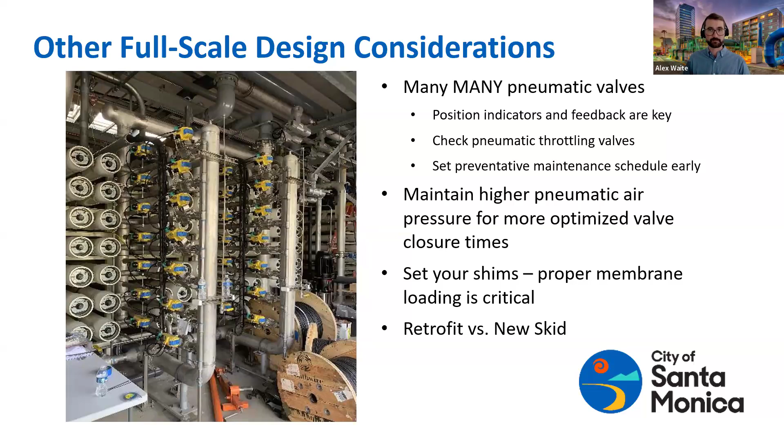And the last thing I just want to say is the retrofit versus new skid. With a retrofit, you are utilizing a lot of the existing hydraulic conditions that you have in your existing system. And there may be some disadvantages to that versus rebuilding with a new skid with something that can be completely controlled by the manufacturer versus working within an existing boundary.

Last things I want to say are in terms of construction and commissioning considerations. This is something we learned through the process: the considerations of a general contractor working on a project like this versus an OEM procurement and construction. With a general contractor who may not be familiar with a high recovery process like flow reversal RO, there was quite a bit of learning time that came into the construction process.

So something we would consider, and hope all of you would consider too, is maybe looking to see if there's an OEM procurement process to facilitate your experience versus having a GC do it. Eventually they were able to get up to speed and it sped up the process quite a bit, but it did take a little bit more time than was expected.

We also recommend building in extra time for unknowns, especially for a retrofit. There's so many things that you don't know until you get out there and try and plug in the theory, and then you actually see the hydraulics of the process and things that you thought were true in the pilot didn't pan out in the full scale.

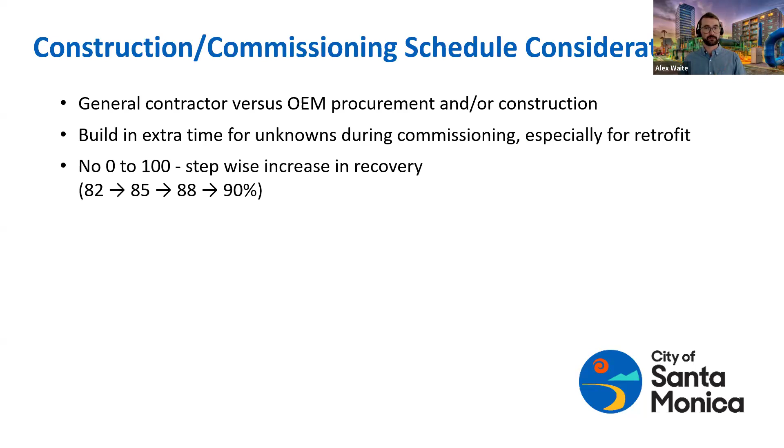So that's an important piece, is build in that extra time. There's also no 0 to 100 in recovery. Stepwise increases in that recovery, 82, 85, 88, and so on, gives you time to assess at each step if everything is working as you expected before you make the next step, where you could actually potentially cause irreversible fouling.

The last thing I would say is to lock in your performance guarantee. You could ask for everything under the sun for the process to work perfectly, but all of that comes at a cost. So there needs to be a compromise on what the expectations are in terms of delivering a system like this, and what RO feed water quality is expected to then set what the performance in the finished water quality will look like.

So for example, for Santa Monica, the performance guarantee was a minimum of 90% recovery in the flow reversal mode, with a CIP interval of every 60 days.

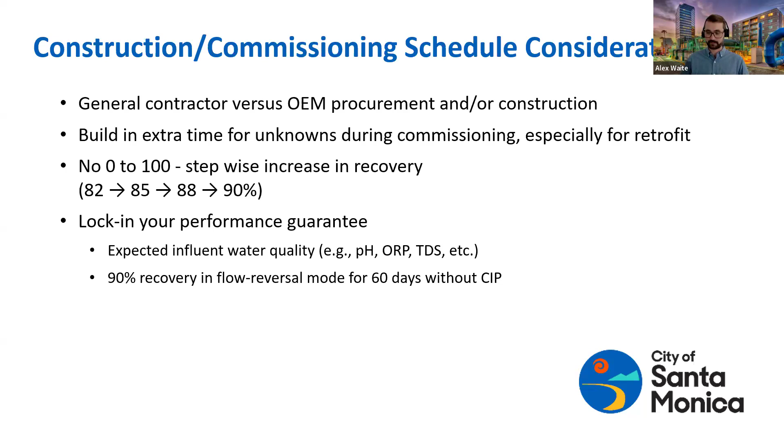So what are our next steps for this project? We're finalizing the permit amendment for the Olympic wellfield restoration. We're continuing a 2-month full-scale contractual testing period to prove out the performance guarantee that I just mentioned.

And then we're looking to optimize that flow reversal transition process to increase that overall recovery to get greater than the 89.1 that I mentioned earlier. Some of the ways we're thinking about this: potentially that second stage rotation, instead of occurring every cycle, maybe every other cycle, every 4 cycles — maybe there's a better time frame to increase recovery there.

Decreasing valve closure times to give us a little bit less time in transition, a little bit more in plug flow mode. And then also just increasing the plug flow mode duration. Right now it's at 1 hour, maybe we could look at 1 hour 10, 1 hour 15. So every little bit will get us a little bit more water production in the end.

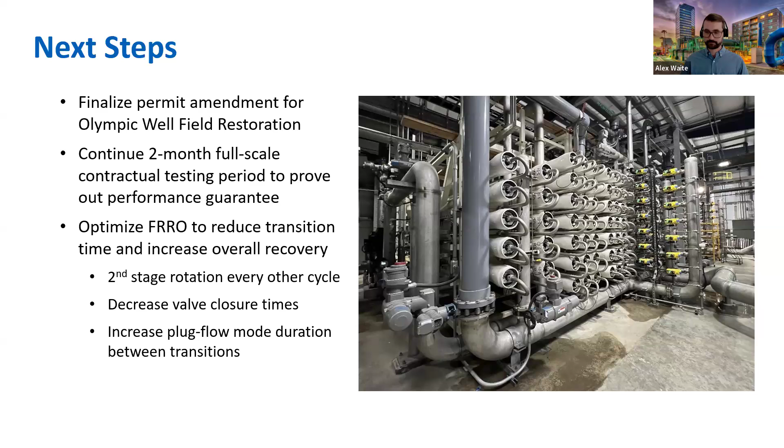Just want to acknowledge all of our regulatory and funding partners, including Department of Water Resources, the Metropolitan Water District of Southern California, the design build team led by Walsh Construction and Brown and Caldwell Design Engineer, GHD as our owner's engineer, and several other teams to facilitate other aspects of the project.

So thank you all very much for your time, and I look forward to your questions.

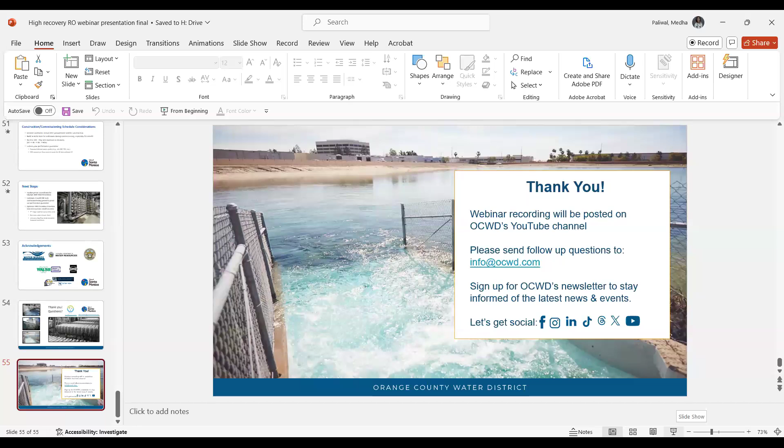Great, thank you all, bye. Thank you for your time. Thank you, Medha, for hosting. Yep, thank you.